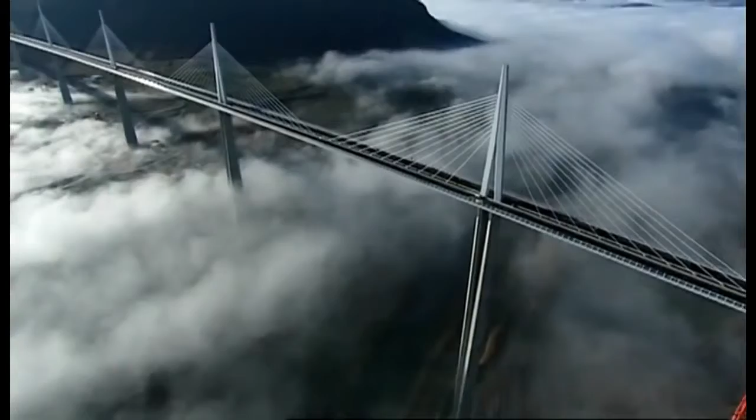This is the Millau Viaduct, the tallest bridge in the world. Its highest tower stretches a staggering 343 meters. So high, the bridge glides above the clouds. But this is a megastructure they said couldn't be built. When I first showed the drawing of this bridge, they really thought I was crazy.

The team attempting to build this amazing freeway in the sky had to survive landslides, fight winds gusting at 130 kilometers an hour, and weather massive storms as the bridge simply hung in the balance. It's a bridge that pushes the boundaries of engineering to the limits, and then beyond.

Imagine building a series of Eiffel Towers, then slinging a 4-lane highway between them, all the way across one of the deepest valleys in France. Impossible though it sounds, that pretty much describes the building of the Millau Viaduct.

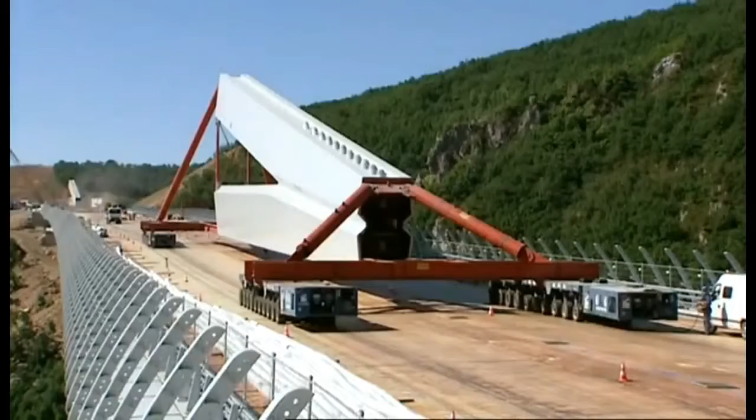From the start, the construction team faced 3 daunting challenges. 1. Build the tallest bridge piers in the world. 2. Put a 36,000-ton freeway on top of them. And 3. Erect 7 steel pylons, each weighing 700 tons. And what's more, they had to do this hundreds of meters above solid ground. So high that if you were on top of the Eiffel Tower, you'd still be looking up at this awesome bridge.

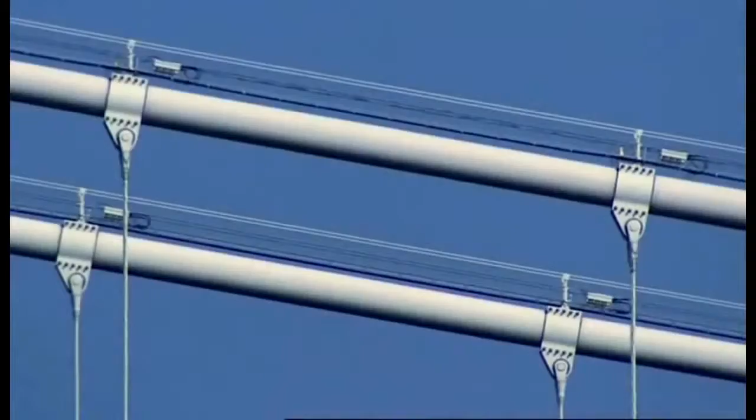October 2001, the team break ground. They're required to build a bridge that'll last for 120 years. And to win the contract, the team promised to build it in record time, less than 4 years. By comparison, the world's longest suspension bridge, the Akashi Kaikyo in Japan, took a full 10 years to build. To up the ante, any delay will cost them $30,000 a day in penalties.

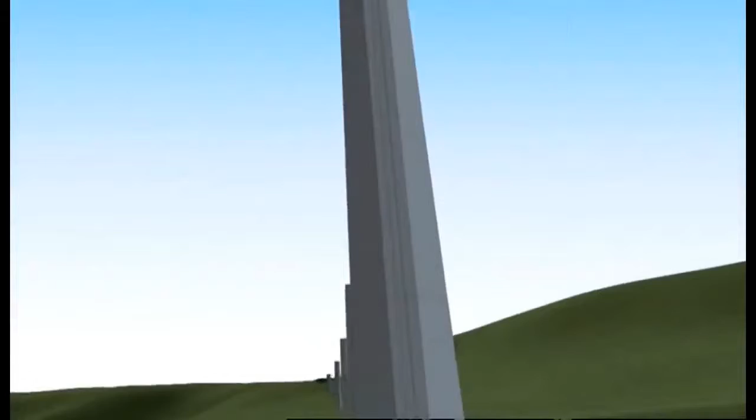There are 7 piers that are numbered from the northern end of the valley. Number 1 will pose problems because of the steep slope. Number 2 will be the biggest challenge since it's the tallest. Crossing the river, number 3 is not much shorter. Then 4, 5, 6, and 7 climb the gentler slope to the south.

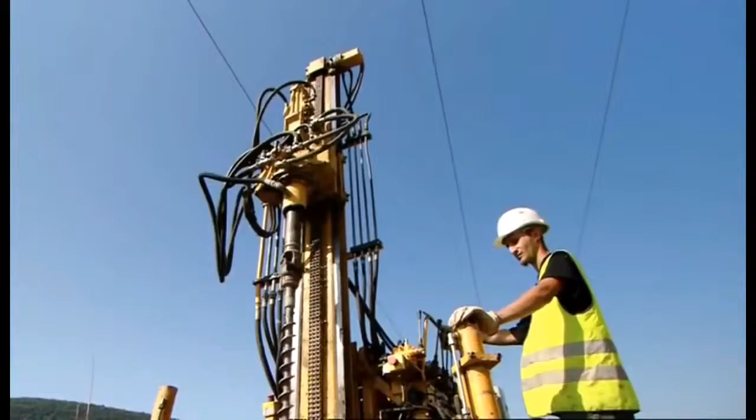To begin, the team had to bury the foundations deep in the bedrock in order to support the enormous weight the bridge will place on them. But the forces of nature were stacked against them. Geologists have warned of the risks posed by the region's fractured limestone. The rock is full of cavities that are essential to the local cheese economy. These cave systems, close to Millau, are home to a unique bacteria responsible for the blue mold in the world-famous Roquefort cheese. But what's perfect for cheese could be disastrous for a megastructure.

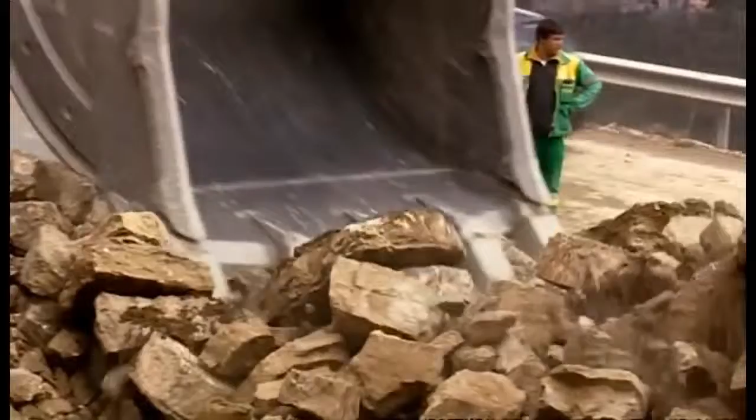The geologist's diagnosis spelt one thing: landslides. This kind of catastrophe could jeopardize the entire project. Despite the warnings, building went ahead as planned. Then, well into construction, as predicted, a dramatic storm causes a landslide. 4,000 cubic meters of rock collapse around Pier 1. Fortunately, the fallen rock doesn't damage the pier, but the warning is clear. They're forced to divert precious manpower and equipment to stabilize the slope and prevent a repeat collapse.

So if the area is prone to landslides, why did they build the world's tallest bridge here in the first place? The answer is simple. In the 1980s, France built a freeway linking Paris directly with Spain. This major artery headed south across the French countryside, while from the Mediterranean, the freeway headed north, until they both hit one of the deepest valleys in France and stopped dead. Welcome to Millau, France's least favorite bottleneck.

The town of Millau is in the mountainous region of the Massif Central, one of the most tranquil parts of France. But in summer, this poor medieval town suffered traffic hell. The locals couldn't take it anymore. Neither could their mayor. It was terrible for our reputation. When you hear every day on the television and radio, avoid Millau, there's a traffic backup, a 5-hour wait in Millau.

And it's not just the people of Millau. Two drivers, Jamila and Jemima, crossing the 30-odd kilometers between the freeway on either side of Millau, reveal exactly why this bridge is needed. Jamila, in car 33, will cross the new bridge, while in car 22, Jemima will take the old road across the valley floor.

Getting straight on the freeway, car 33 approaches the Millau Bridge after just 18 minutes. The only delay is the 30 seconds it takes to get through the toll booth. Then driving at 100 kilometers an hour over the spectacular bridge, she takes just 32 minutes to get to the other side. Car 22, meanwhile, is just beginning the crawl through the medieval streets of Millau. Cyclists, pedestrians, people with dogs all need to be negotiated.

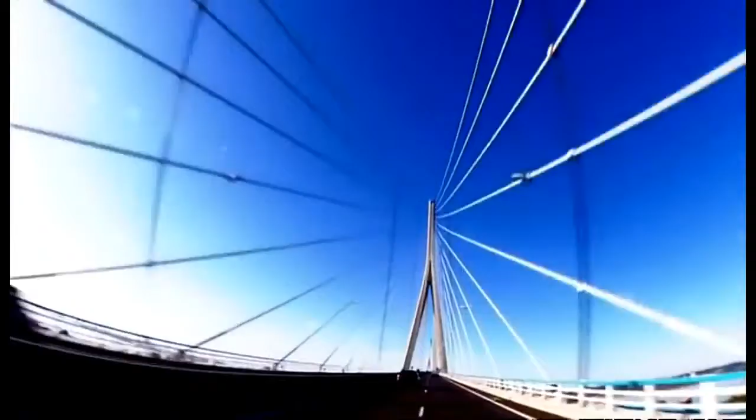His plan, another cable-stayed bridge, but pushing the technology beyond anything previously attempted, with piers 4 times higher than the Normandy Bridge. The Millau Bridge would not only be the world's tallest, it would be unlike any bridge ever constructed. When I first showed the drawing of this bridge to the government authorities, they really thought I was crazy.

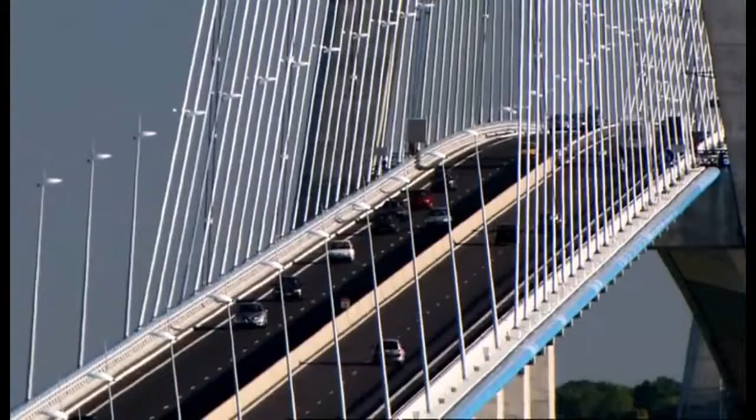Virlogeux's Normandy Bridge has 2 sets of cables supporting the deck. But he wanted to up the stakes for Millau by losing 1 row of cables, so the remaining line would be forced to do twice the work.

More dramatically, the 2.5-kilometer Millau Bridge, instead of having a single main span, needed a whole series of piers to support it across the valley. No bridge builders had ever attempted a multiple-span, single-line cable-stayed bridge on this scale before.

The French authorities had a problem. Nervous about Virlogeux's groundbreaking scheme, they held a competition inviting other engineers and architects to compete with different designs. The winner, Lord Norman Foster, is one of the world's superstar architects.

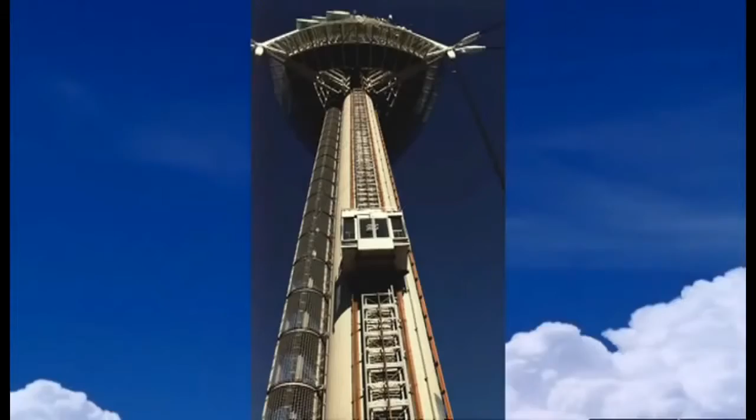In Hong Kong, he built the world's largest airport terminal. In Barcelona, offices literally hang from a mast on his communications tower. This is a man who regularly contemplates the impossible and delivers. You know, it's the challenges, and it's one challenge on top of another, on top of another.

And with Millau, one of the biggest challenges was making it fit into the landscape, given it's just down the road from the famous Gorges du Tarn, France's equivalent of the Grand Canyon. How do you make something which has to be so immensely strong against the forces of nature look very gentle, very delicate? How do you weave something on that scale into the most unbelievable landscape?

Ironically, Foster's answer was to take Virlogeux's pioneering scheme, then push it one stage further. He turned an elegant piece of engineering into a delicate work of art by boldly cutting out 2 of the 9 original piers and seriously slimming down the remaining piers and road deck.

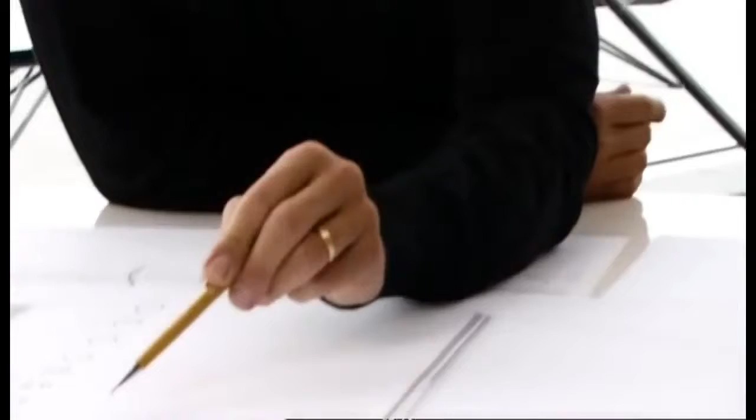Foster wanted the bridge to appear as delicate as a butterfly, but this butterfly has to support the weight of 5 Eiffel Towers in gale-force winds hundreds of meters above the River Tarn. Getting the design wrong would be a disaster. Then, with Millau still on the drawing board, Foster's record as a bridge builder suffered a major setback.

His Millennium Bridge in London is actually another record-breaking structure, the lowest profile suspension bridge in the world. But when this footbridge opened to the public in June 2000, it was a public relations disaster. Crowds walking over it set up a resonant frequency, and the bridge began to sway. As people adjusted their step to the small initial wobble, the effect was magnified.

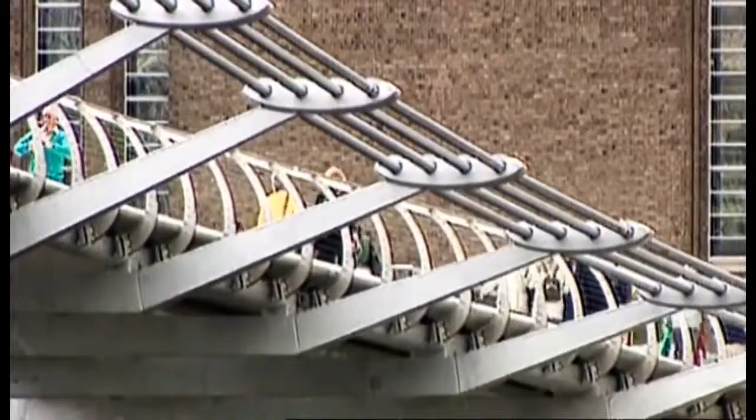Though it didn't threaten the structure, the swinging motion became so dramatic, the authorities closed the bridge for a refit that took 1.5 years and ended up costing over $8 million. It was a bad omen for the Millau Bridge, where construction was soon to begin. And at 15 times the height, a design flaw would be a catastrophe.

December 2001, France's Millau Viaduct, the tallest bridge in the world, is under construction. Everything about this project is supersized. It'll need 200,000 tons of concrete, so much that the team have to build a concrete factory on site.

But there's nothing straightforward about this concrete. The formula must be just right. It needs structural strength to support the massive loads it'll have to bear.

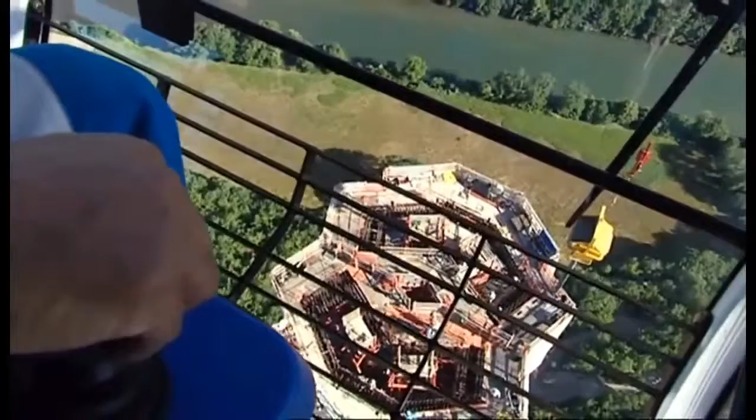But it can't set too quickly, as it has to be hoisted into position and poured hundreds of meters in the air. And it needs to be just the right color to suit Norman Foster's vision. In fact, the architect's vision has created a headache for the construction team. He's designed each pier as a complicated geometric shape, tapering the entire way up with vertical grooves set into them to create shadows. But what's just a line on paper for the architect was a major challenge to build.

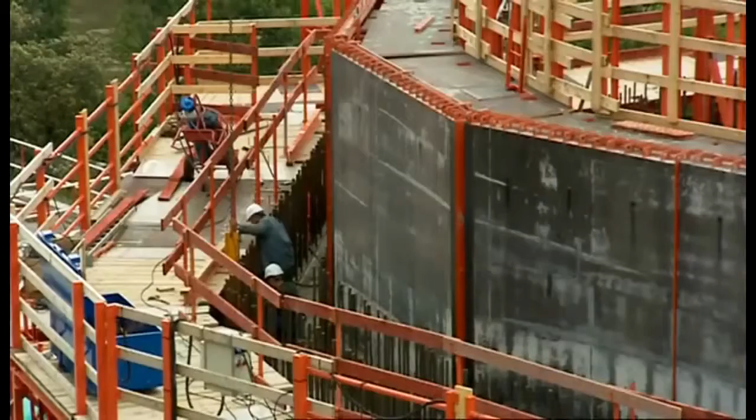The enormous piers are built step by step by pouring concrete into a temporary mold. To give the required strength, the molds are filled with a frame of steel reinforcing bars. In total, 16,000 tons of these steel bars are hoisted into place and secured. Laid end to end, they'd stretch the 4,000 kilometers from Millau all the way to Central Africa.

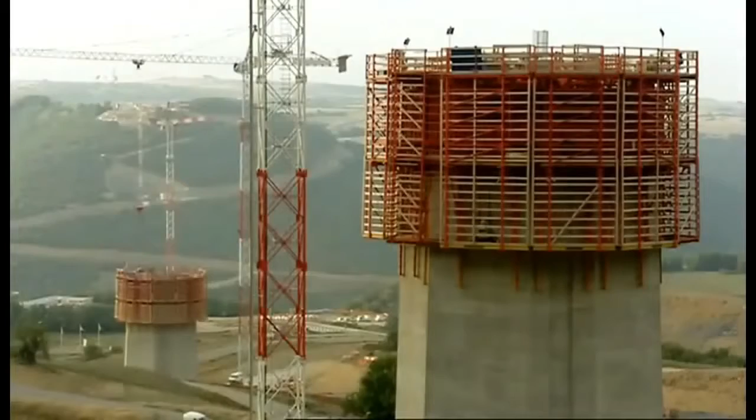The shape of each pier is seriously complicated. As a result, each time they remove the sections of red steel shuttering, they have to change the shape of the mold to fit the profile of the next 4-meter section. Manhandling these steel panels, weighing up to 15 tons apiece, is no picnic. And with the combined height of the 7 piers totaling well over 1 kilometer, they have to change the shape of the mold over 250 times.

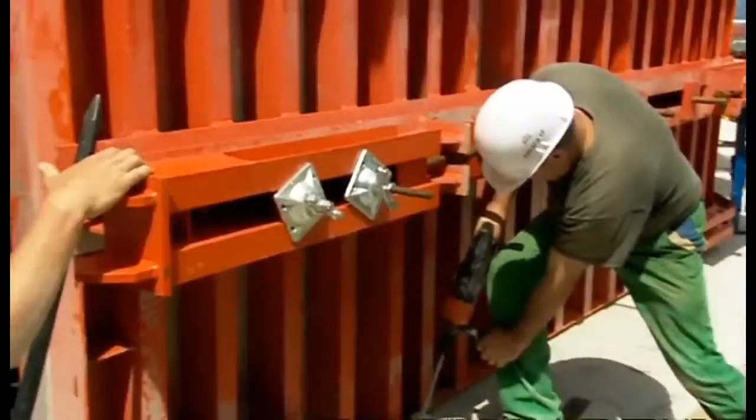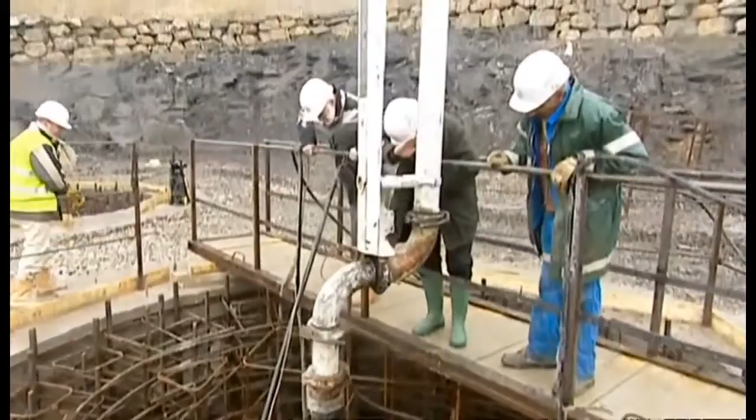Every 3 days, each team on each pier went through this whole cycle. Then they repeated the process. But it was a race against time, with a permanent threat of delay. Keeping the entire build on time and to budget was the daunting responsibility of one man, Jean-Pierre Martin. If instead of 3 days we took 4, imagine that multiplied by the number of castings. We'd end up with a 3 or 6 month delay. With a penalty of nearly $1 million a month, this isn't something Martin wanted to contemplate.

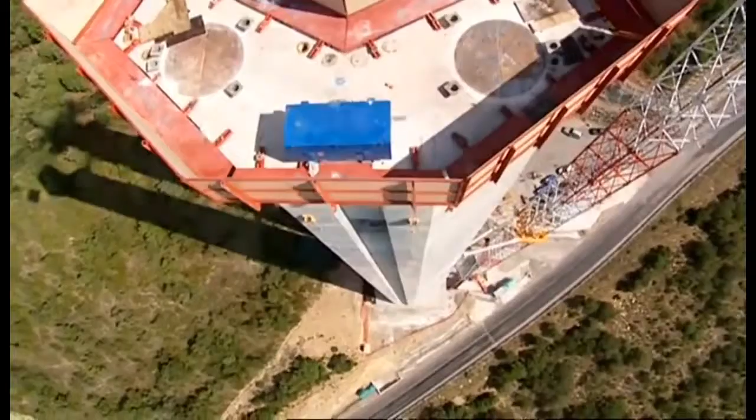And this schedule wasn't his only headache. You have to be pinpoint accurate when you're building the tallest bridge piers in the world. Get it wrong, and the bridge simply won't fit together. Just 10 centimeters out, about a hand's width on each 4-meter section, and the tallest pier could be 6 meters off at the top, the width of a jumbo jet fuselage. Each team was aiming for a specific point in the sky. For Pier 2, this was exactly 245 meters above the ground, 546 meters from the north side, and 1,914 meters from the southern end. There was no room for error.

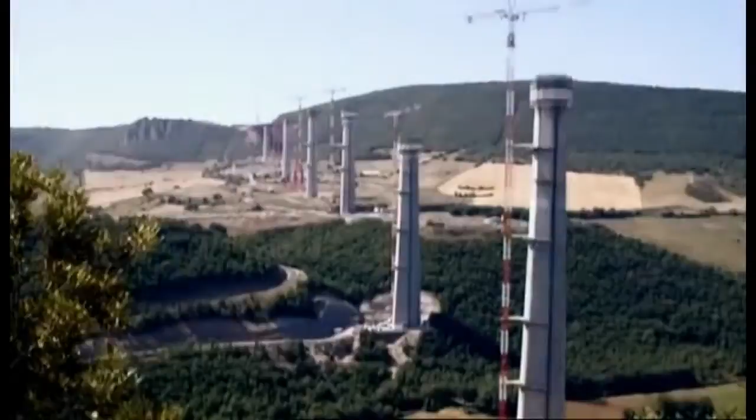The only chance they had to get it right was with GPS, accurate to within 4 millimeters. Using signals from multiple satellites, the team could pinpoint their position and make sure they're on target for that critical point in the sky they needed to hit. Month after month, the piers climbed higher. Finally, by November 2003, they reached their full height. At 245 meters, Pier 2 becomes the highest bridge pier in the world. But is this record-breaking pillar where it's supposed to be? Amazingly, it's dead on target, to within 2 centimeters.

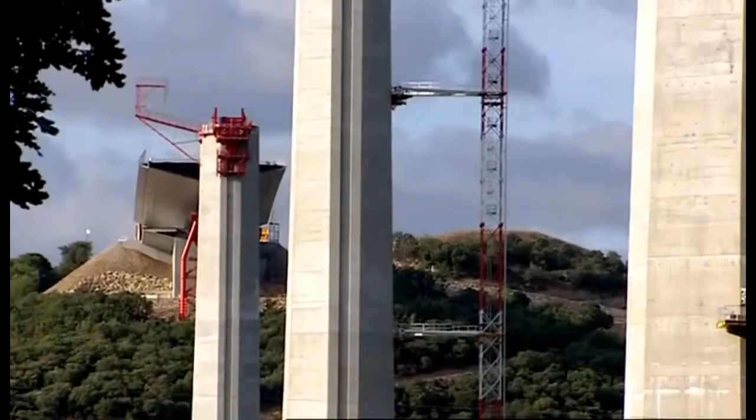Champagne corks pop. It's time for a major celebration. Against all the odds, they were 1 month ahead of schedule, but the team couldn't afford to relax. The next stage of the project would be the most difficult part of the build. Phase 2 of building the world's tallest bridge involved putting a 2.5-kilometer roadway weighing 36,000 tons on top of the piers, a full 270 meters above the River Tarn.

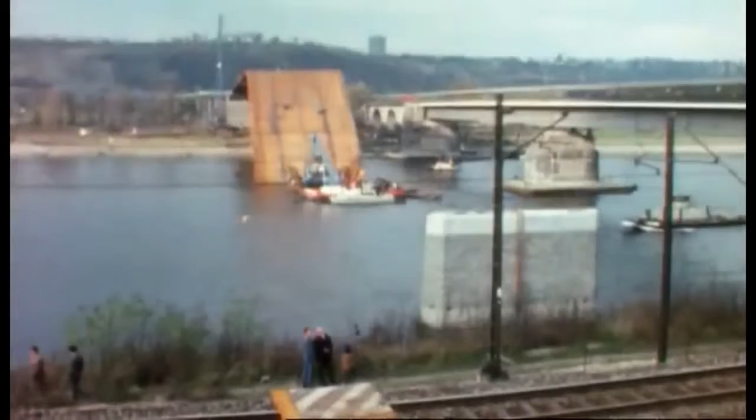Bridge builders know danger comes with the territory, but working at these heights can be lethal. More than 34 died constructing New York's Brooklyn Bridge. 35 died in 1970 on the Westgate Bridge in Melbourne, Australia. And 1 year later, 13 workers were killed when the Koblenz Bridge in Germany collapsed into the Rhine.

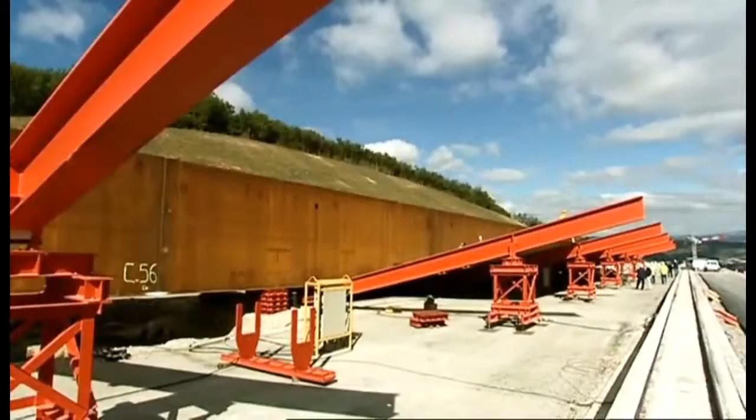With these fatalities in mind, the team decided to fabricate the entire road deck on the safety of solid ground. This meant building it in steel, which in theory would be much safer than lifting vast concrete sections hundreds of meters into position. There's only one problem with this plan. No one had ever put a road deck on piers anything like this height before, let alone over a 2.5-kilometer span.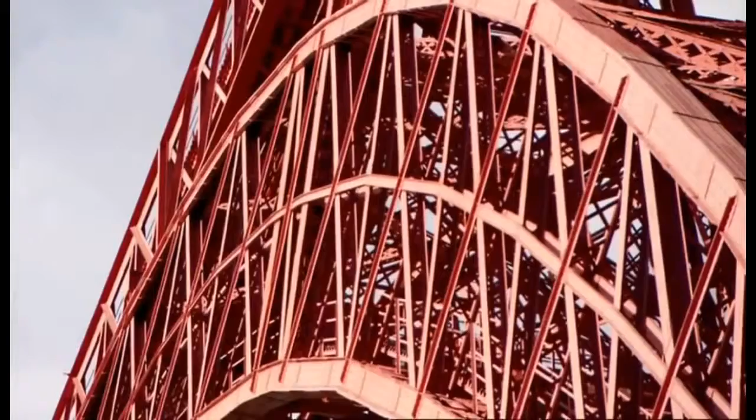In the end, only one steel manufacturer had the courage to take on this colossal challenge. Eiffel, the steel firm set up by the great French engineer. Eiffel built what was once the tallest bridge in the world, the Garabit Viaduct in southern France, before getting round to the framing for New York's Statue of Liberty and, of course, his signature tower in Paris. But despite the company's experience, Eiffel's director, Marc Buonomo, knew he was taking a serious risk. It was a gamble for the company, because if there had been a mistake, if it hadn't worked, it would have been the whole company.

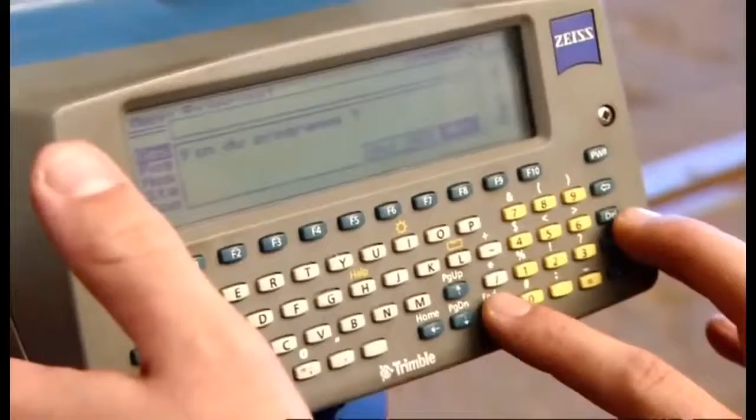They fabricated the massive sections that would make up the road deck in the company's steel factories. This immense jigsaw puzzle involved manufacturing 2,200 separate sections, weighing up to 90 tons and some of them 22 meters long. Their accuracy is measured with a laser to within a fraction of a millimeter.

The huge square tubes are the central spine that should make the deck rigid. The triangular side panels will be welded on either side to create the width for a 4-lane highway. To meet the punishing schedule, Buonomo automated the manufacturing with a 2-headed welding robot and a plasma cutting machine.

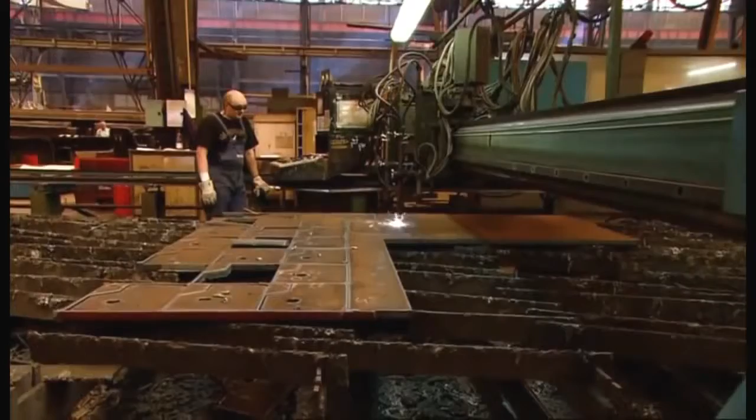Each cutting pattern or template is programmed into the computer. Then the machine automatically blazes its way through the steel. The torch reaches a scorching 28,000 degrees centigrade. That's 5 times the temperature of the Earth's inner core.

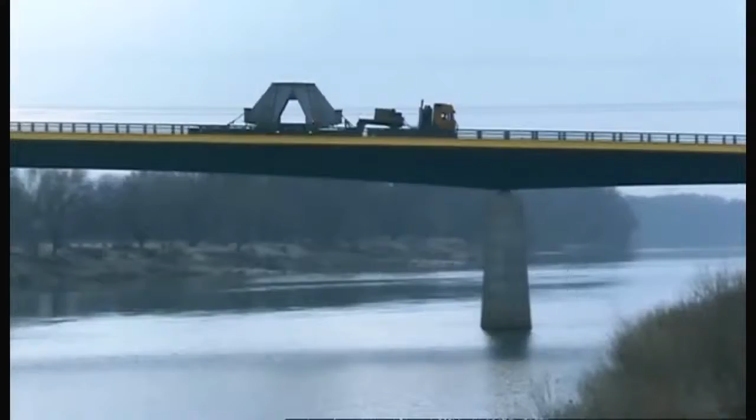But cutting and welding was the easy part. The hard part was getting these monster sections the hundreds of kilometers from the factories to Millau. The routes had to be planned with precision to avoid major damage. The police coordinated safety and clearances. Even with that level of preparation, some obstacles felt as if they're cutting it just too close for comfort.

And this was no one-off event. To build the viaduct took over 2,000 of these extraordinary road convoys. The components arrived at assembly plants set up, one on either side of the valley. Here, the pieces of the massive jigsaw puzzle were welded together to form the 2 halves of the deck.

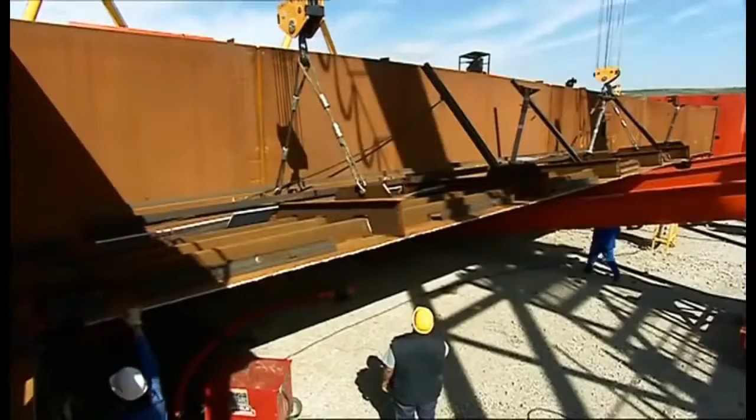But getting these 2 halves to span the valley on top of the world's tallest bridge piers would be a major challenge. They'd be the first team to put a road deck on a pier taller than an 80-story skyscraper. And pushing bridge building beyond anything attempted before, they planned to slide the entire 2.5-kilometer road deck over in 2 colossal pieces. The bridge's chief engineer, Jean-Marie Cremer, was one of the few people who believed it could be done.

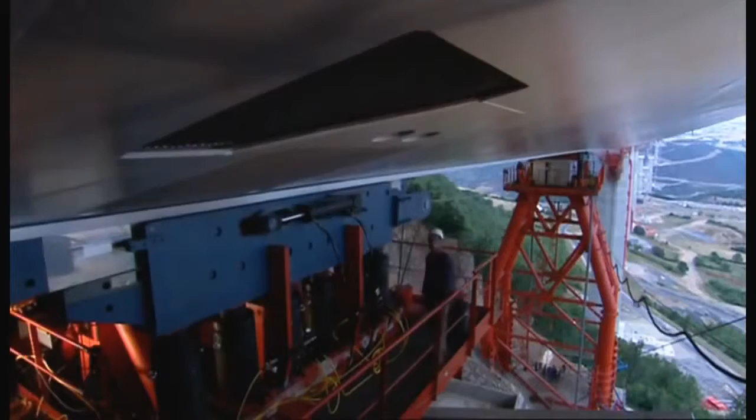All the engineers who know this method, who were in the know, didn't believe it was possible. If the team had got their calculations wrong, the entire structure could collapse into the valley. We found a solution for the construction, which was to launch the bridge from the 2 sides. One part on the Larzac Plateau, one on the Rouge Plateau. And to push them from the 2 sides and to make them come and meet here above the River Tarn.

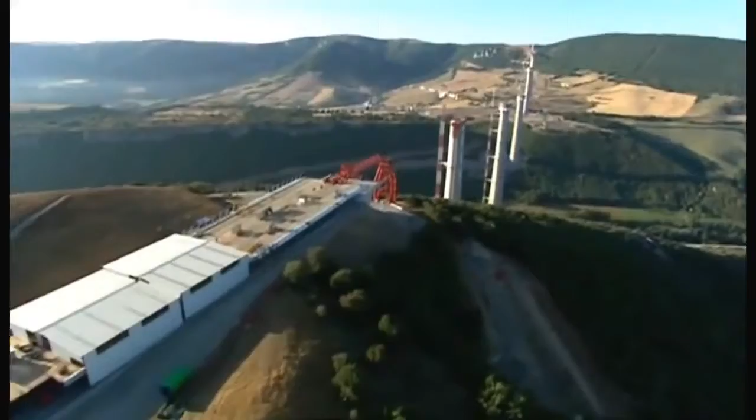Smaller bridges use a similar technique. A powerful set of hydraulic rams literally pumps the deck from one side to the other. But Millau would be the longest launch ever attempted over the highest piers in the world, and the results could spell disaster. The deck is so slender, it would bend and collapse if it were pushed out over the 342-meter spans between each pier. The furthest anyone's previously managed is less than half that distance.

The first part of the solution was simple. Fit a pylon so its cables support the front of the deck as it goes out over the valley. Then construct temporary steel support towers that halve the spans to a more manageable 171 meters. These steel towers were a construction feat in themselves. The largest, over 170 meters high, is the tallest ever built, and they needed to carry a massive load.

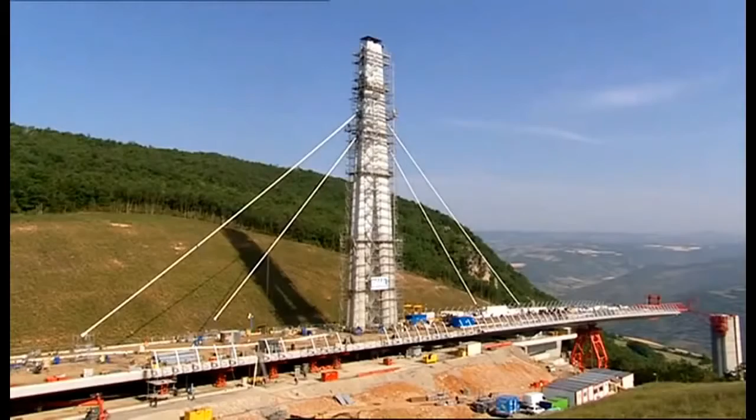7,000 tons as the leading edge of the deck, together with the first 90-meter pylon, slide over. And simply pushing this enormous weight over the top of the vulnerable piers would bring them crashing to the ground. This was the nightmare scenario. If we'd done a conventional launch, we would have knocked the piers over like the pins in a bowling alley.

Someone needed to reinvent the way this type of bridge is built. And it's Marc Buonomo with Jean-Marie Cremer who came up with the breakthrough. The basic principle can be demonstrated with a heavy box and a wobbly table.

With a normal launch, you knock over the piers. I want to advance the deck over the pier, but if I push the deck from here, I'd knock over the piers, because they're so tall.

The idea is to install a launching system on top of the pier, and that way, if I push the deck, it has no effect on the stability of the piers, and the piers won't fall over. The trick is to use a series of these launching systems to jack up the deck and inch it forward.

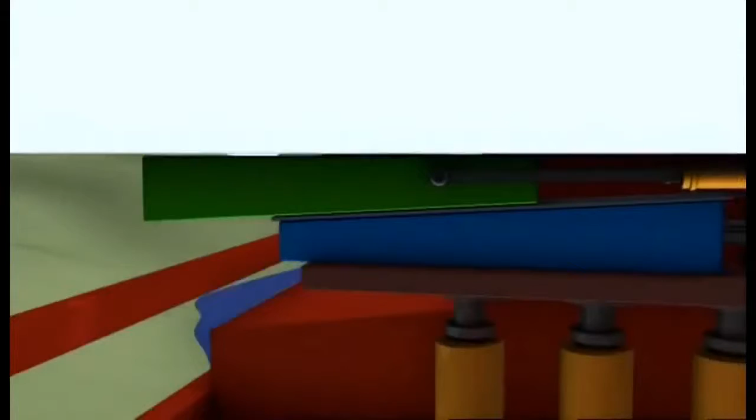Each system uses two wedge-shaped blocks under each side of the deck. The upper wedge is pulled forward by a hydraulic ram. It slides up the slope of the lower wedge at the same time, lifting the deck from its supports and advancing it 600 millimeters. The lower wedge then retracts, dropping the deck onto its supports. The upper wedge returns to its original position, and the whole cycle begins again.

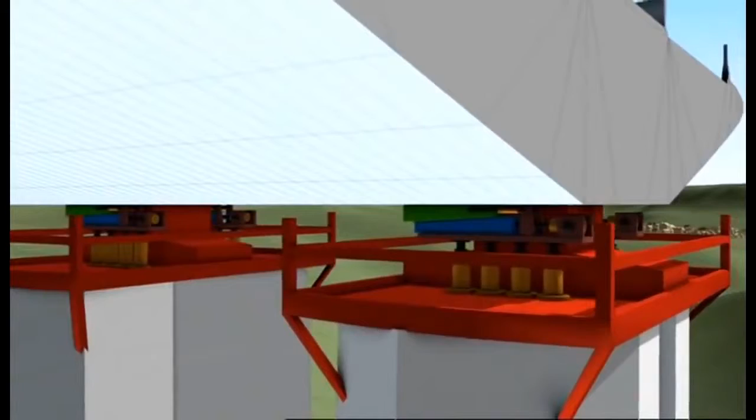4 of these clever devices are placed on each pier, all programmed to work at exactly the same time. The result is that together, they pick up the entire roadway and shunt it forward. But if one fails or gets out of step, it could spell disaster. The force could push the bridge piers apart till they collapse.

When you're up there and you see Millau 300 meters below you, you ask yourself, was this a good idea? The future of the entire project was now hanging on a prototype, and it had never been tested.

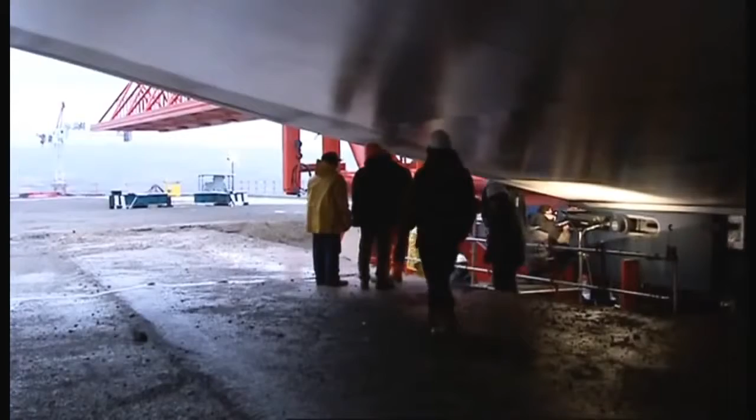It's the morning of February 26, 2003. Do or die day for the world's tallest bridge. Everything is about to be put to the test. The flexibility of the deck, the strength of the temporary piers, and critically, the pioneering hydraulic ram system. Even Buonomo, the man in charge of the launch, had his doubts. As it had never been done before, I have to tell you, I had fears that it wouldn't work.

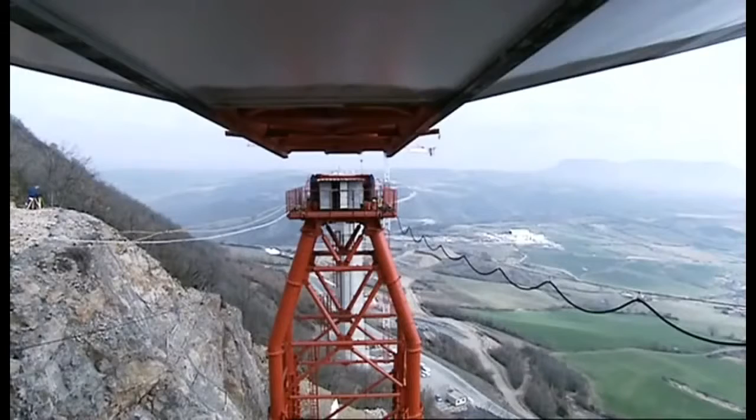The pumps kick in, the pistons start to push, and the deck begins its huge journey across the valley. The moment I heard the motors start, I put my finger on the deck, and I could feel my finger move. Every 4 minutes, the deck advanced 600 millimeters across the valley. Surveyors tracked its progress. But it was still a nail-biting time as they watched the unsupported deck crossing the void.

Eventually, the deck reached the safety of the first pier. 204 meters down, only 2,256 to go. The launching system seemed to be working as planned. The engineers were feeling optimistic. But as the deck advances into space, it'll become more vulnerable to the wind, which can reach 130 kilometers an hour.

Unfortunately, the road deck has the shape of an upside-down airplane wing, and the team's greatest fear is that this wing could simply take off. The engineers kept a close eye on the wind and weather conditions. When they were satisfied there was a 3-day weather window and the wind wouldn't exceed 85 kilometers an hour, they'd give the construction team the go-ahead, and the deck launch could continue. The reason for this precaution is simple. Strong winds can literally tear a bridge apart.

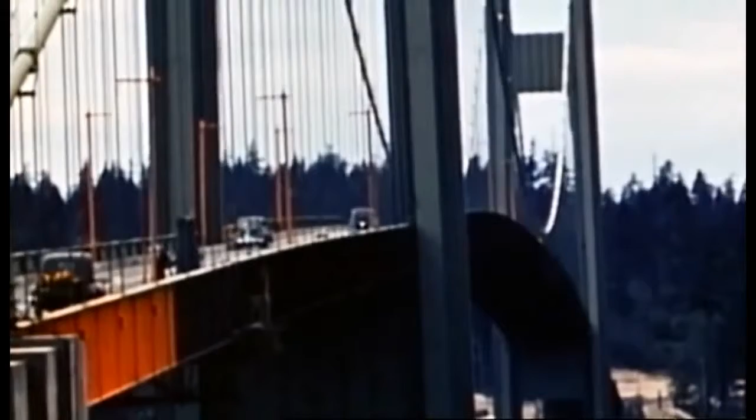In 1940, Washington State built a suspension bridge across the Tacoma Narrows in the US Northwest. It opened with a grand ceremony on July the 1st. But the celebrations were short-lived. The bridge had a major problem: the wind. Girders beneath the deck, designed to make the bridge rigid, actually blocked the wind, causing the roadway to ripple alarmingly. Locals soon dubbed it Galloping Gertie.

On the 7th of November, with the wind less than 70 kilometers an hour, the bridge begins to twist violently. At 11 a.m., time runs out for Galloping Gertie. The wind sends the bridge crashing into the river. Wind tunnel testing is now standard procedure as a direct result of Galloping Gertie.

For the Millau Bridge, they analyzed the wind in the Tarn Valley over 18 months, then recreated those conditions in the wind tunnel. Wind engineer Olivier Flamand was shocked by the results. The average wind speed was relatively low, but because there's such strong turbulence, it created very fast peak winds. The rugged terrain creates serious turbulence at the height of the road deck. Winds peak at 130 kilometers per hour. That's hurricane force.

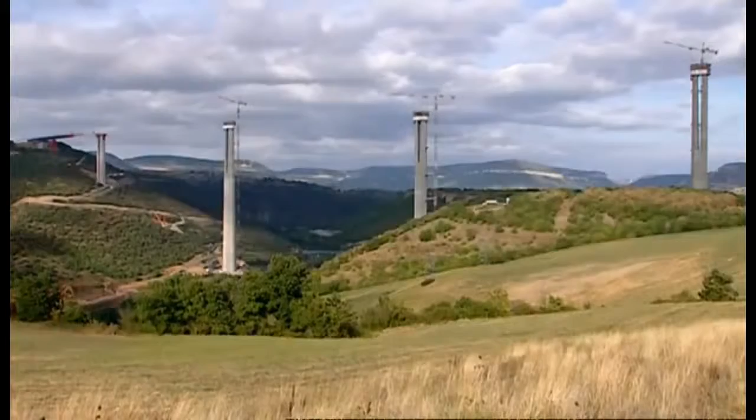They tested every aspect of the bridge to analyze the risks: piers, pylons, and critically the deck. But it's not just the aerodynamics of the finished bridge. They needed to find out how it would behave when it was most at risk, during the launching of the deck.

Olivier and his team reached a chilling conclusion. The winds they've measured are strong enough to blow the unsecured deck off its supports and send it crashing hundreds of feet to the valley floor.

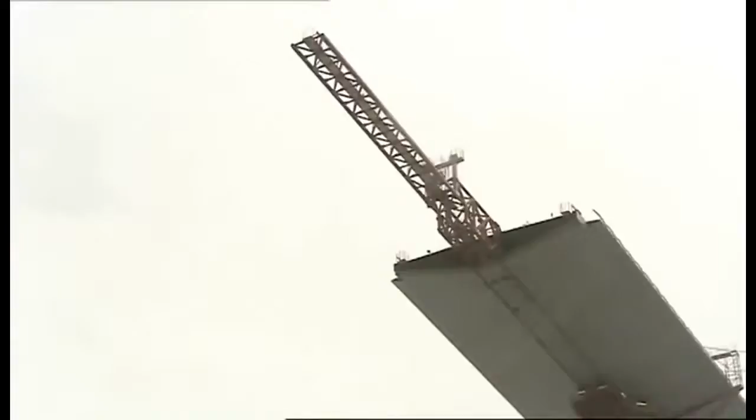And then the nightmare began. On the 22nd of August 2003, 6 months into the deck launch, one of the launch systems failed, leaving the deck hanging in the wind. To make matters worse, the weathermen were predicting storms.

So far, these massive pumping machines had worked perfectly. But the fact is they were prototypes, and due to the frantic schedule, they'd never been tested. The problem was that the non-stick Teflon between the sliding surfaces had ripped, and the friction generated was too much for the hydraulic rams to push against.

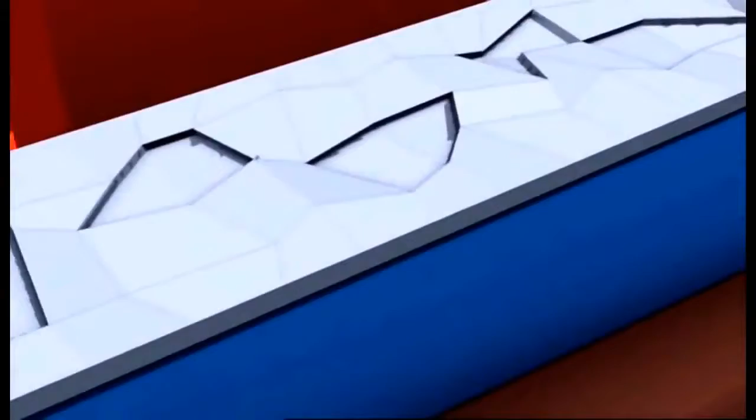Unfortunately, no one had planned on replacing parts of this monster machine mid-launch on the top of a massive concrete pillar. This was very bad news for the man who staked his reputation on this system. It was maximum stress, like poison in your mouth. You don't forget that.

Re-examining their calculations, they realized the cause of the problem. They'd underestimated the forces between sliding surfaces, but they wouldn't be able to repair it without the necessary spare parts. The clock was ticking, and Marc Buonomo needed a solution fast. When Apollo 13 came back with that incident, the NASA engineers requested they did the inventory of everything there was on board to know how to fix it.

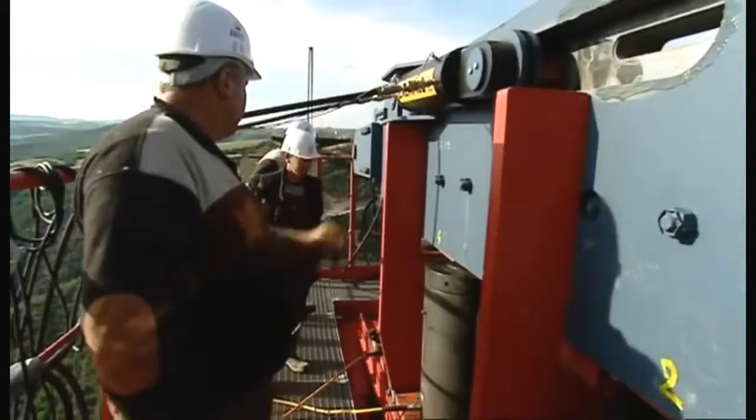The Millau team did an inventory. They realized that the other launching machines, not yet being used, could be stripped to provide the new Teflon surfaces they needed. Working all through the night, the team extended the access platform. This allowed them to take out the 5-meter-long, 2-ton steel wedges, replace the Teflon, and reassemble the launching machine. By 8 a.m. the next morning, it was ready to resume the launch.

The rest of the week, the predicted storms arrived, and another set of launching machines wore out. So when the deck finally made it to the safety of the next pier, the team breathed a major sigh of relief. You don't forget that. I won't forget that, for 4 hours I was really scared.

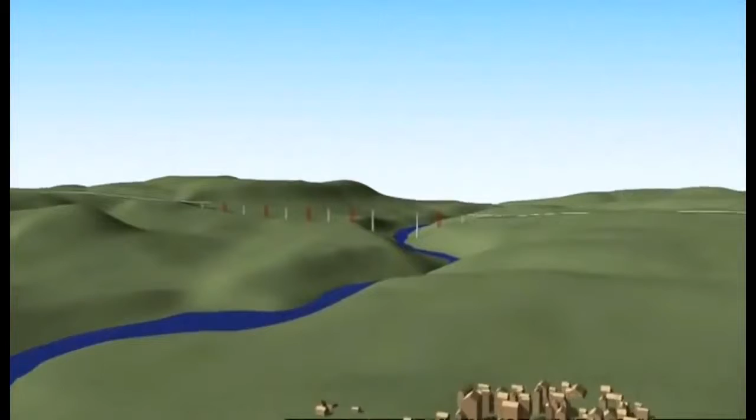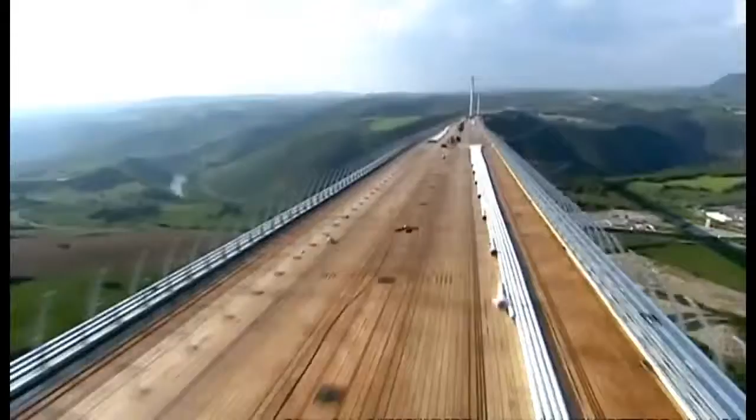The two decks continued their journey across the valley, day after day, week after week for a full 14 months. They approached each other, millimeter by millimeter. By May 2004, they'd reached a critical phase. From the northern end, the shorter deck had traveled 717 meters into space to reach its final resting place. From the south, the longer deck extended over 1.5 kilometers. Only the section over the river, the one point where it was impossible to erect a temporary pier, divided them.

But would they meet as planned? If they've got their calculations wrong, they'll have built the biggest white elephant in Europe. Even the man behind the whole project had his doubts. I was not convinced at all that the two parts of the deck could meet exactly with a perfect geometry. The odds were against them. Calculating such a feat so precisely is a Herculean task.

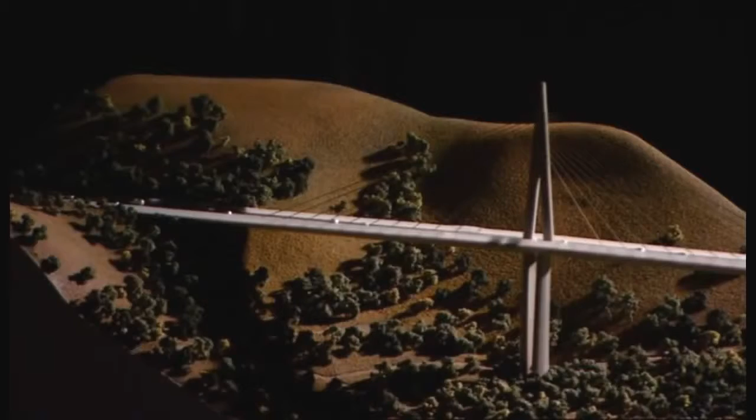Firstly, the two starting points on the northern and southern slopes of the valley are at different heights. Secondly, the bridge has a subtle curve to it. As a result, each steel panel which makes up the road deck had to be cut and welded with extreme precision. It would be an engineering triumph if they got these two sloping curved decks to meet as required.

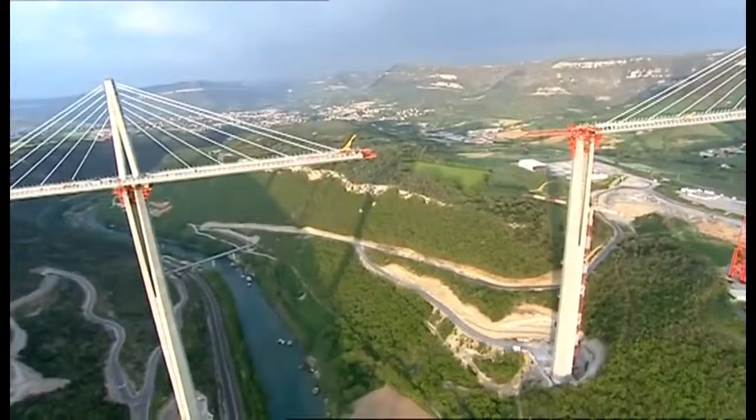The team checked the weather reports. With the wind inside safety limits, they gave the go-ahead for the final push. The rams began to drive the deck's leading edge off the safety of Pier 3 towards its destination. At this point, a total of 21 launching systems needed to move at exactly the same moment to avoid disaster. If anything were to go wrong now, the man responsible would be Marc Buonomo.

Everyone asked me, how can you be sure that it will go straight? So to be sure that they were going to the right place, I had a GPS put on the front, so I could see the gap between the theoretical and the real position.

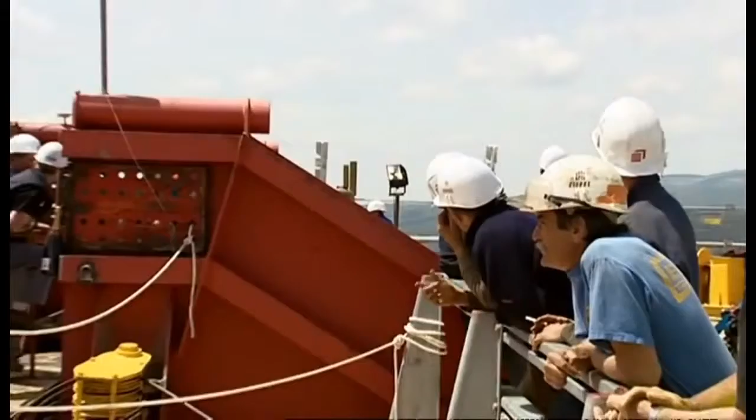Over the next 2 days and nights, the deck advances 600 millimeters at a time towards its final resting place. The world's media are watching the critical meeting of the decks. And to add to the pressure, the French Prime Minister is due to drop in to celebrate the event. The deck pushes forward, now with only centimeters separating the two sections. A magnum of champagne is hung between them to mark the moment.

At last, union. The two massive steel decks have traveled high over this valley, a total of 2.5 kilometers, and when they check, they're aligned to within 1 centimeter. That's accurate to within 99.9999%. All the measuring, all the calculations have paid off. They've nailed it.

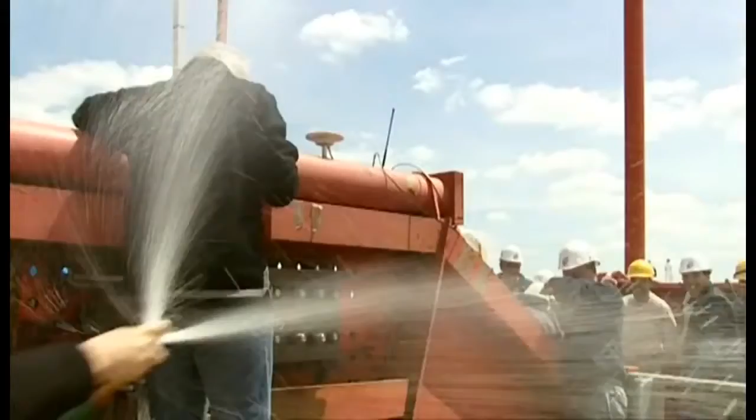The meeting of the decks was a special moment. News reports traveled round the world, and in Salzburg, Austria, they reached Felix Baumgartner, aka Fearless Felix. Felix has made a career base jumping from some of the tallest structures on the planet, and within 24 hours, he'd driven to Millau and was calculating the logistics for the jump, factoring in his two main aims, to avoid arrest and death.

Baumgartner waited for darkness before arriving on site. He found his way to the base of Pier 2, then climbed an access ladder the full 245 meters to the top. He entered the steel road deck and found a place to hide until daybreak. He had to remain concealed until the sun was high enough for his cameramen to record his world record attempt.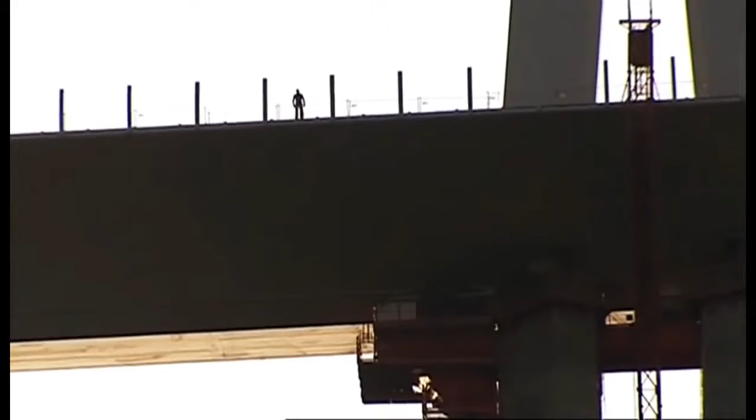At 7 a.m. the following morning, Felix the Conqueror emerged. He took a cool backward flip off the tallest bridge in the world and entered the record books. The tallest bridge in the world, 250 meters. I did it. And having evaded death, he made sure he's not caught by the police.

The decks have been joined, and the team have reached the final phase of the project. But there was still a race to meet the schedule, and their problems weren't over yet. Everyone could see the dramatic undulations in the flexible steel deck. Even some hardened bridge builders wondered about its structural integrity. It was a huge surprise for everyone. All the engineers said, we knew steel was flexible, but not that flexible.

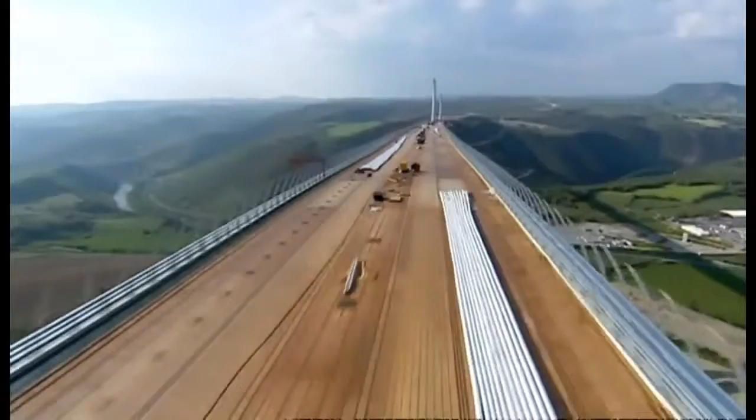The team were relying on the pylons and cables to pull the deck straight. Each massive pylon is 90 meters high and weighs 700 tons, the equivalent of 85 London buses. Placing them in position on the slender deck, high above the valley floor, would go beyond anything ever attempted. Once again, Marc Buonomo had a plan. You know, the first people to make vertical pylons were the Egyptians. Buonomo adapted a technique used in ancient Egypt to erect obelisks in the sands.

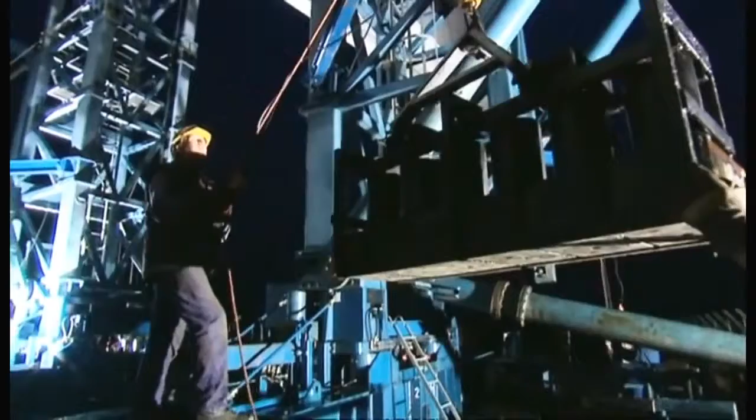On top of the road deck, the team put up two enormous steel towers, both of them secured by cables and equipped with a hydraulic system capable of raising 1,000 tons. The 700-ton pylon is then lifted by the hydraulics. As it rises, it pivots little by little until it's vertical. It's then lowered safely onto its anchorage point. Buonomo's 4,000-year-old technique worked to perfection.

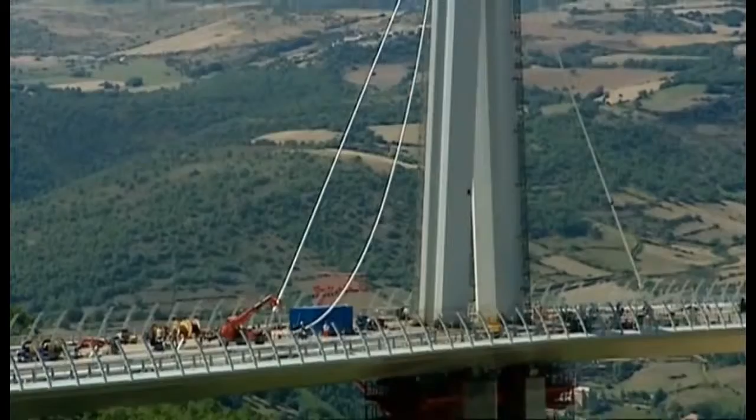With all 7 pylons in place, the team could attach the cable stays that would straighten the rippling deck and give it the strength to cope with full traffic loads. They hope. The weight of the roadway is now over 40,000 tons, the equivalent of a cruise ship, and the 154 cable stays should prevent it from sagging or collapsing. The strongest stays are made up of 91 individual steel strands and have a breaking strength of 2,500 tons, strong enough to hold back 25 jumbo jets, all at full throttle.

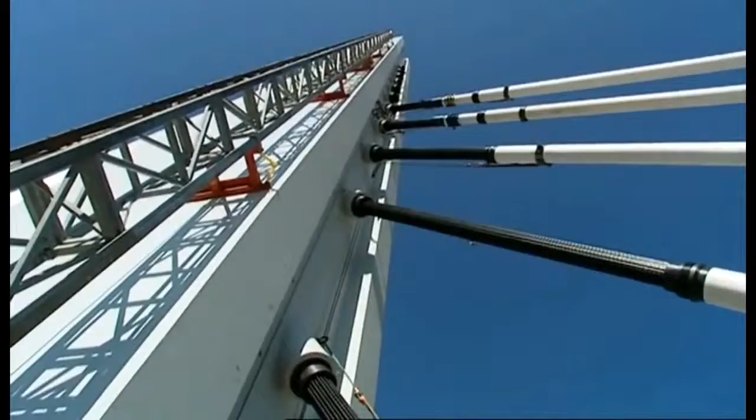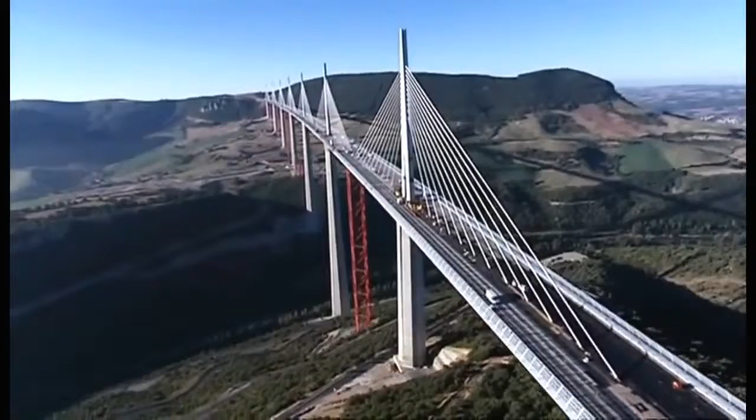As the cable stays are tensioned, true to plan, the ripples in the road deck are pulled straight. Over the 2.5-kilometer deck, the ripples are now no larger than the size of a thumb. They're finally on the home straight. The road surface goes on, adding a further 10,000 tons to the load. That's like driving 153 battle tanks onto the deck. But before it could open to the public, the team needed to know the bridge is safe. It would have to pass one crucial test.

After 3 years, the construction team building France's Millau Viaduct, the world's tallest bridge, are about to find out if they got their calculations right. On a single-span cable stay bridge like the Normandy Bridge, a large load on the main section is no problem because the cables are attached to solid ground and can't give.

On the Millau Viaduct, with its 8 spans, the cables are attached to the deck of the adjacent sections. A load on one section will cause it to drop, pulling the stays down. As the pylons lean in, the matching stays are pulled upwards, lifting the neighboring decks and causing a dangerous rippling effect.

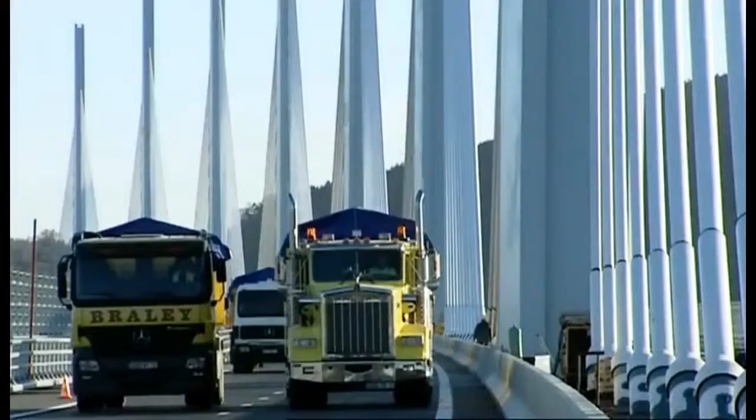It's right now the team put their bridge to the test. These 28 trucks have a combined weight of over 900 tons. They are now positioned in the critical point, mid-span. The engineers hold their breath. Measurements are taken. The span bends just 26 centimeters. This is a triumph for the engineers. The bridge was designed to cope with more than double that.

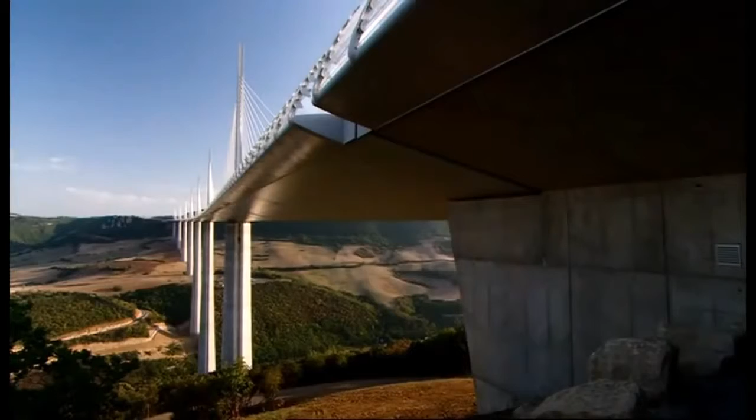4 weeks later, on December the 14th, 2004, President Jacques Chirac officially opened the Millau Bridge. A proud moment for the whole of France. Just over 3 years of construction have produced the tallest bridge in the world, designed to last at least 120 years. And against the odds, the project manager even brought the job in on time. But that's not what he's most proud about. What I remember, because on construction sites there are often accidents, is that we had no serious accidents, nothing more than a minor injury.

As soon as it opened to the public, the bridge was an instant success. But the real test isn't till its first summer, and the French all take their annual vacation. No one ever expected anything like this. Numbers peaked at more than 50,000 vehicles a day. At over $7 per car, that's great news for the construction company, who are clawing back their $478 million investment in the project.

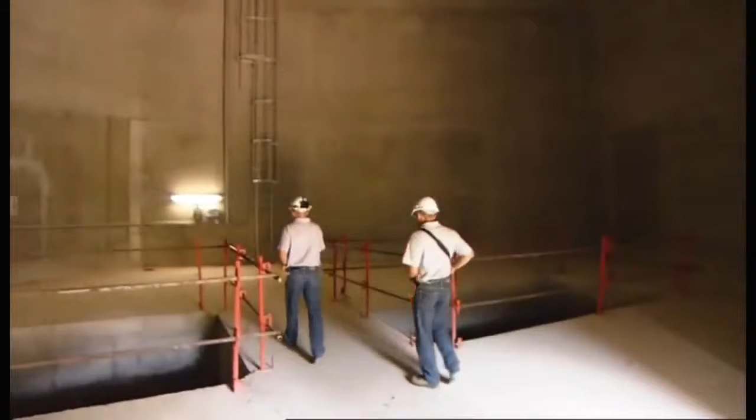This was an epic bridge to build, but it's just as epic to maintain. Thierry and Frank are assigned to P2, the world's tallest bridge pier. This structure is no solid concrete block. It's a series of vast hollow spaces. Their job today is to test the communication system and electric circuits on each of the 7 structural floors. This involves a 343-meter climb, going hand over hand up a ladder for the rest of the day. By dusk, when Thierry finally reaches the summit of the pylon, he may be exhausted, but there is a payoff. You get a fantastic view from here, a 360-degree panorama.

The tallest bridge in the world has become an icon. But this is creating problems no one had ever imagined. Locals have been taking over the bridge as a platform to get media attention for their causes. This crowd was hoping that driving sheep over this freeway in the sky would help them get more farming subsidies.

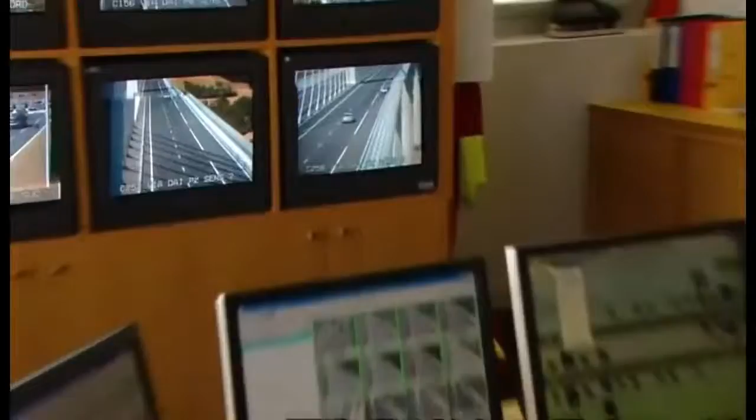Jose's job is to prevent this kind of incident from creating a danger, and on this bridge, the incidents keep on happening. An alarm triggered by a motion detection system means there's a stopped vehicle on the bridge. Immediately, Jose dispatches a colleague to deal with the situation. The last thing anyone wants is a multi-car pile-up on a 2.5-kilometer bridge, quarter of a kilometer in the sky.

Jose zooms in his camera to reveal the man has left his car and is sitting dangerously on the crash barrier. The driver's probably only broken down, but already one man who stopped climbed over the wind barrier and jumped to his death. Bruno intervenes. Thankfully, it's no more than an irresponsible photographer who's sent on his way.

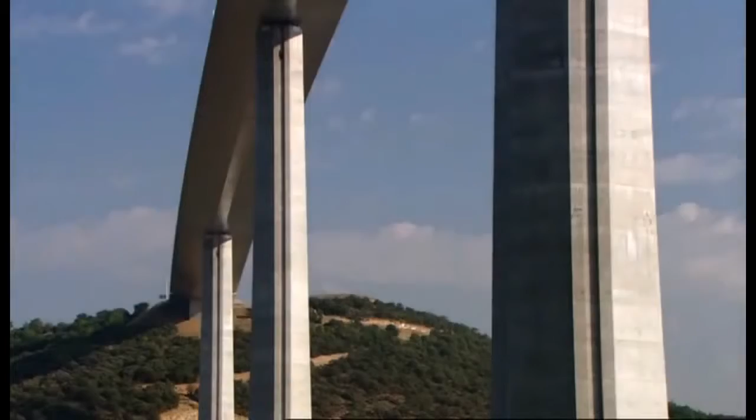You could say the Millau Bridge is a victim of its own success. It's definitely become a major tourist destination. 700,000 visitors in the first 9 months. Fortunately, most of them wait till they're off the bridge to take their photos. It's magnificent. I came 600 kilometers today to see the Millau Viaduct. There's only one thing to say. It's extraordinary. They're drawn because it's a world-beating structure, but also because it's incredibly beautiful, delicate, and minimal. Not what you'd expect from a structure that's nearly a third taller than any other bridge on the planet.

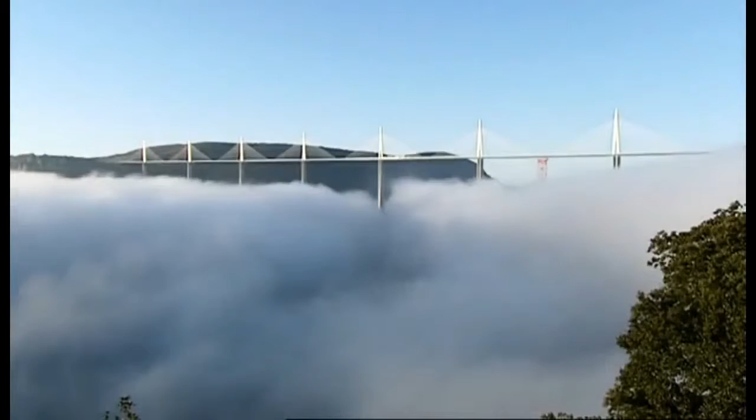And architect Lord Norman Foster's achieved his aim to give the driver the sensation of soaring. As you leave these plateaus, you do fly. You fly across this bridge. Literally, you are above the clouds. And the result certainly pleases the man who dreamt it all up. To see erected this bridge, which I imagined 15 years ago, it's something magic. This is the longest pure cable stay bridge in the world, the tallest roadway in the world, and of course at 343 meters, it is the tallest bridge ever constructed.